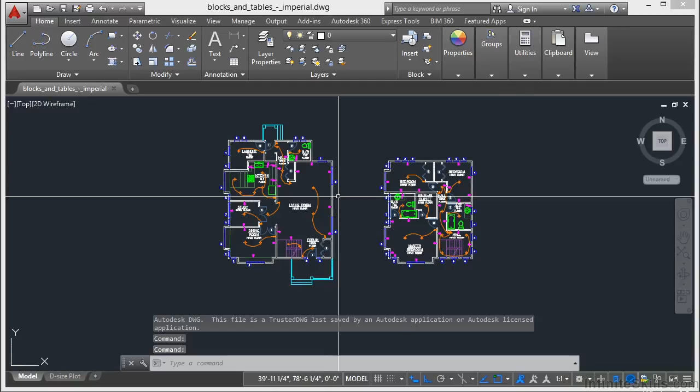Now when grips are turned on, you can select the objects that you want to manipulate before entering a command, and you do that by selecting an object. So if I select this arc, I can see that it has 1, 2, 3, 4 different grips, and the grips are those blue boxes.

Now to use a grip mode, you just select the grip by clicking on it. That turns it into a hot grip, it turns red. When I do that, I'm able to manipulate that object in specific different ways. Right now my ortho is turned on, so it's constraining what I do. Essentially, this is executing the stretch command on the endpoint of this arc. I'm going to turn off my ortho, so you can see here I'm moving that vertice, or that endpoint, of that arc.

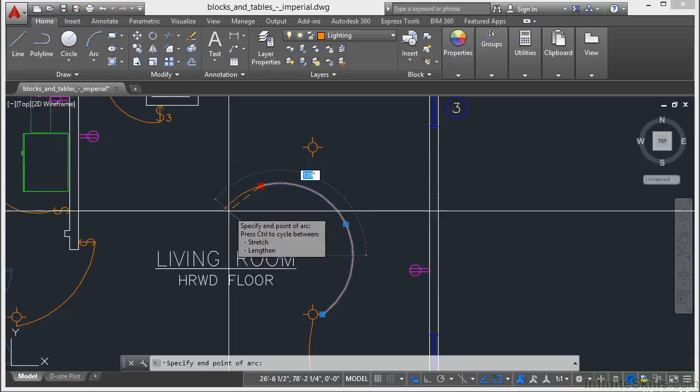Now some grips, most of them in fact, will have different options. If you just hover over the arc, don't click it yet, don't make it a hot grip, just hover over it, you'll get some options. Now on the endpoint of an arc, I have two: stretch and lengthen. We just saw the stretch, but the lengthen option allows me to either make the arc longer or shorter. Now I can type in the distance, I can type in an angle, or I can just left click somewhere.

Now on the quadrant of an arc, I have two options: stretch, which is using the stretch on that midpoint, or radius. Now I'm shrinking the radius and the center point stays the same. Now the center point grip of an arc is just a move command.

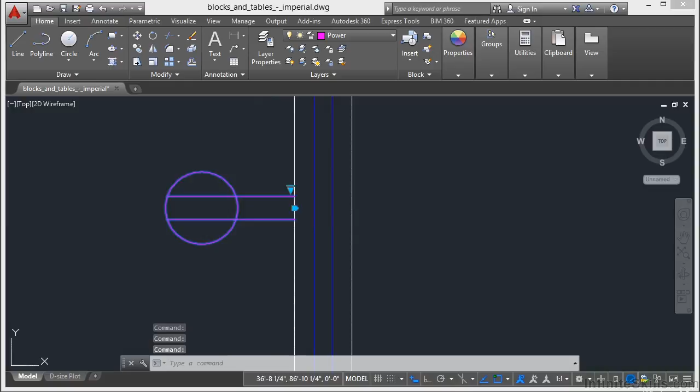Now a lot of different objects will have very similar types of grips. This is a block, it has some grips. This is specifically a dynamic block, which allows it to do certain things. That will depend on the block itself.

If I have a line, I select it, I get my hot grips. The endpoints again are just like with the arc. I can stretch it and lengthen it - it's a stretch at the same time there, and then I can do just a lengthen, shorten it, make it longer. And the midpoint is just the move command again.

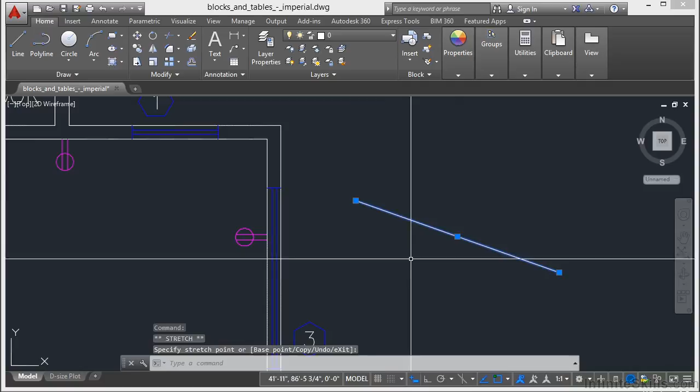Now if I have a circle, there aren't many different types of grips on a circle. I have my quadrant grips, which will just change the radius, or I have my center, which will allow me to move it. Now, different types of objects will have different types of grips, so it's really cool to find out what they are.

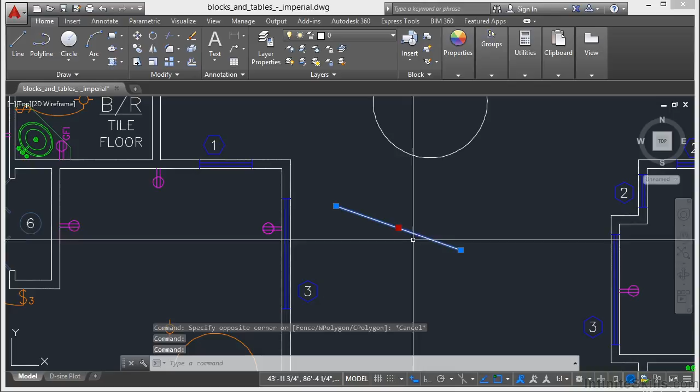Now, you can select multiple grips at a time. So if I select this line, select the midpoint and the endpoint, this becomes a move command, and it's going to keep these relative to each other. It's kind of like still doing just the center point.

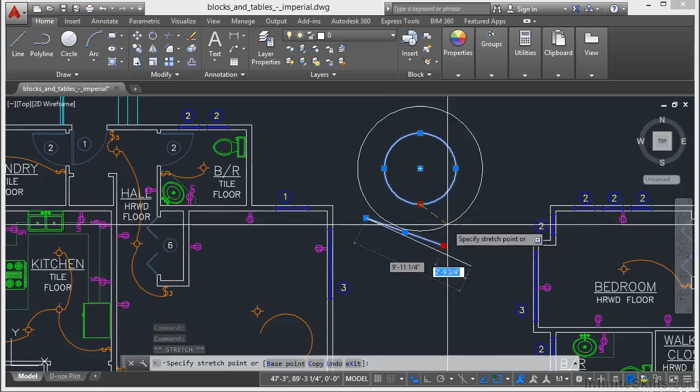But if I select another object, and I select by holding down Shift, just that one grip, as well as that grip, I'm changing both of them relative to each other - changing them both according to how I move it. So if you need to keep objects like this line right here that same distance apart, you can grip edit multiple objects at a time. So keep that in mind as something you might want to do. Hold down the Shift key first, select your grips, and then you can move both items accordingly.